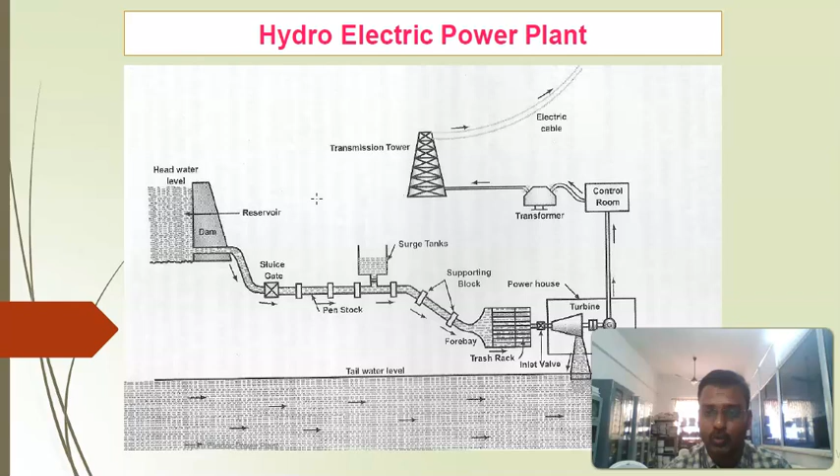Components: the reservoir, where water is collected during the rainy season, is stored in the reservoir. A dam is built across the river for adequate water head. Penstock is a passage through which the water flows from the reservoir to the turbine.

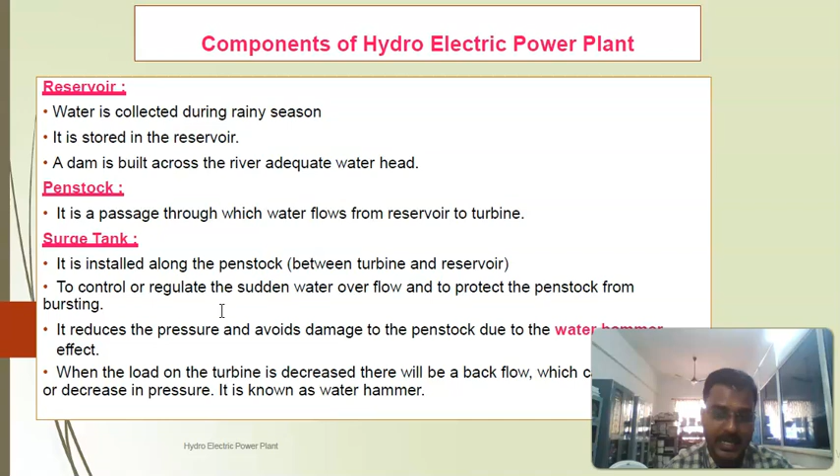The surge tank is installed along the penstock to control or regulate the sudden water overflow and to protect the penstock from bursting. It reduces the pressure and avoids damage. Using the surge tank helps avoid damage to the tank as well as the penstock, and avoids the water hammer effect. When the load on the turbine is decreased, there will be a backflow which causes increase or decrease in pressure.

Other components: the powerhouse, which consists of the water turbine, generator, transformer, and control. The water turbine uses Pelton, Kaplan, or Francis types to convert the pressure and kinetic energy into mechanical energy. Then the draft tube is used to connect the outlet of the turbine to the tail race. It refers to the downstream level of water discharge from the turbine.

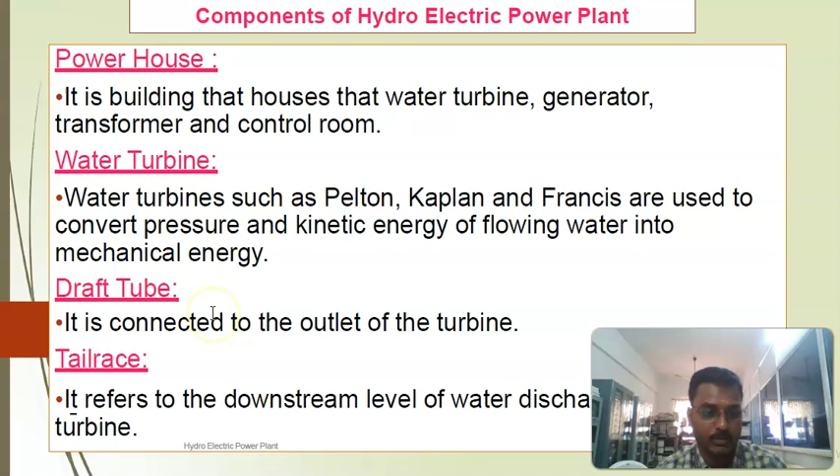Components and working principle: it uses the potential energy of the water when stored in the reservoir. As we explained through the diagram, we know that where the water is stagnant, it is called potential energy. The water from the reservoir flows through a penstock and then through the nozzle or nozzles, which will reach the turbine.

The hydraulic turbine converts the kinetic energy of the water into mechanical energy, where the blades in the turbine rotate. So the shaft of the turbine is coupled to the generator that generates electricity.

The electricity generated is fed to the step-up transformer to increase its voltage. Power is fed to the transmission lines for distribution. The output power of the hydel power plant depends on the head of the water stored in the reservoir and the quantity of water discharged. So this is the working principle of the hydroelectric power plant.

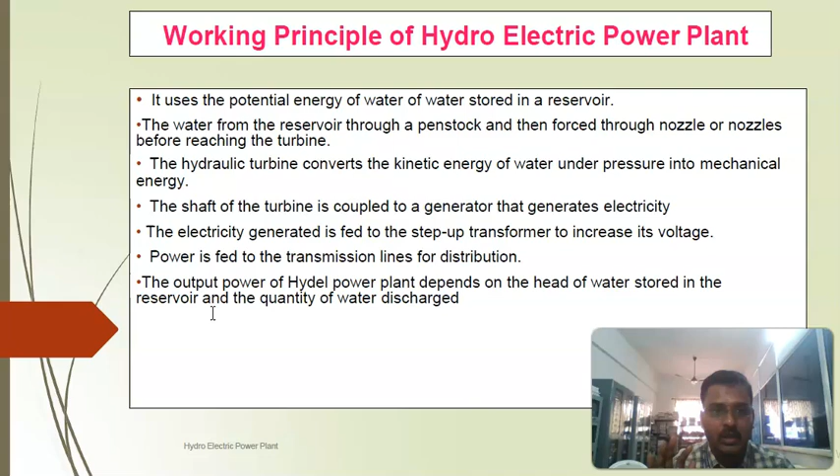Classifications of hydroelectric power plant: high head is above 300 meters, medium head is from 30 to 300 meters, low head is from 3 to 30 meters.

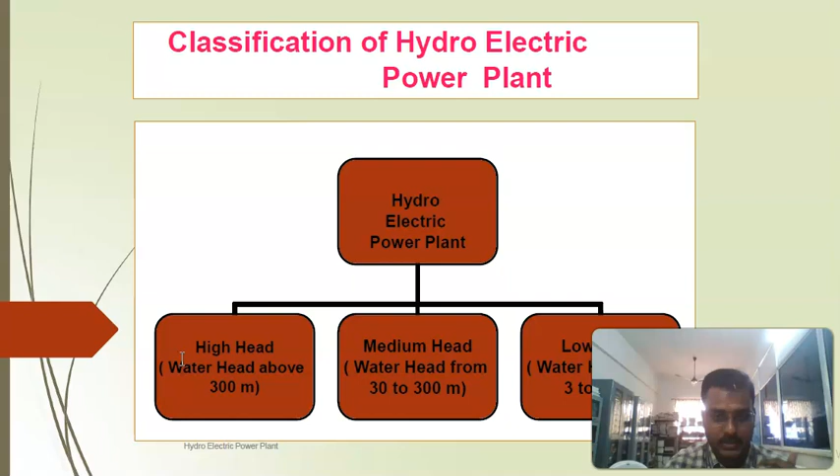Factors to be considered for the location of a hydroelectric power plant: availability of water, adequate water must be available with good head. Cost and type of land: the bearing capacity of the land should be good to withstand huge structures and equipment.

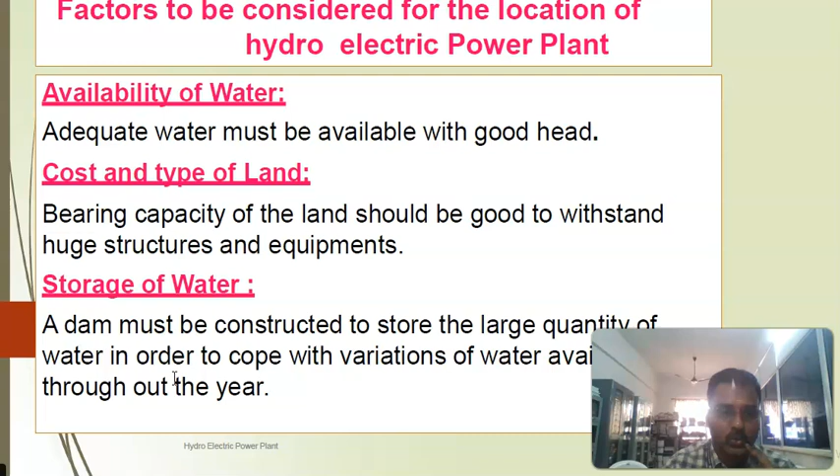A dam must be constructed to store the large quantity of water or to cope with variations of water availability. Other factors include transportation facilities and pump storage facilities.

Merits of the hydroelectric power plant: requires no fuel unlike a thermal power plant or some other power plants, low operating cost, simple in construction, requires less maintenance, very robust and durable. The reservoir and dam can also be used for irrigation.

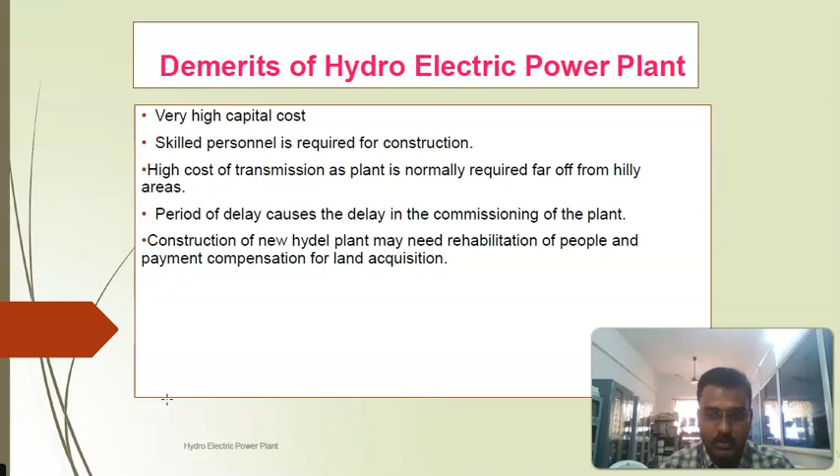Demerits: very high capital cost, skilled personnel required, high cost of transmission, period of delay causes delay in the commissioning and construction of new hydro plants, and requires resettlement of the people and payment of compensation.